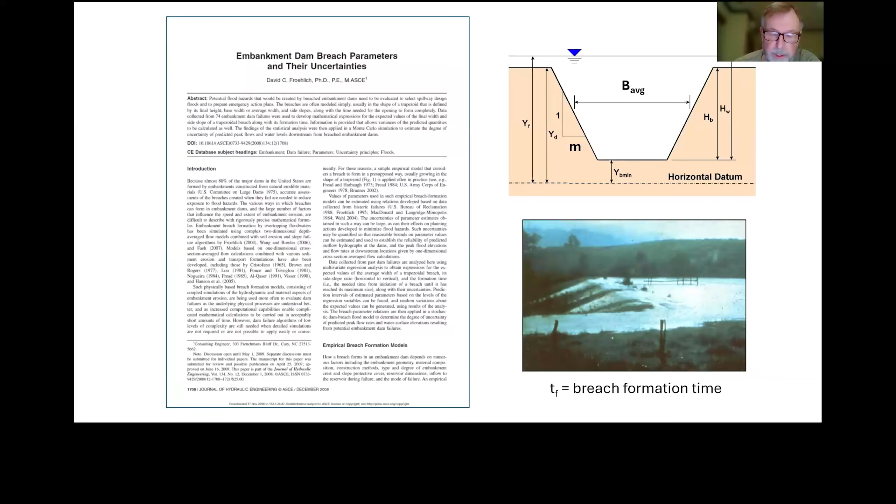But let me also mention that all of these predictions are based on collected data that I've assembled over the years. These are data that I find reliable. They're not just some numbers pulled out of the air or some newspaper article that says the breach width was about 100 meters. No, these are all data that I have documentation for, so I have confidence in them. Of course they're not perfect, but it's the best available.

So later on, after collecting more data, and realizing that Monte Carlo simulations involving, say, 10,000 realizations is a little challenging, there's a simpler way to take into account the variability of the outcome, and that's using a point estimation method.

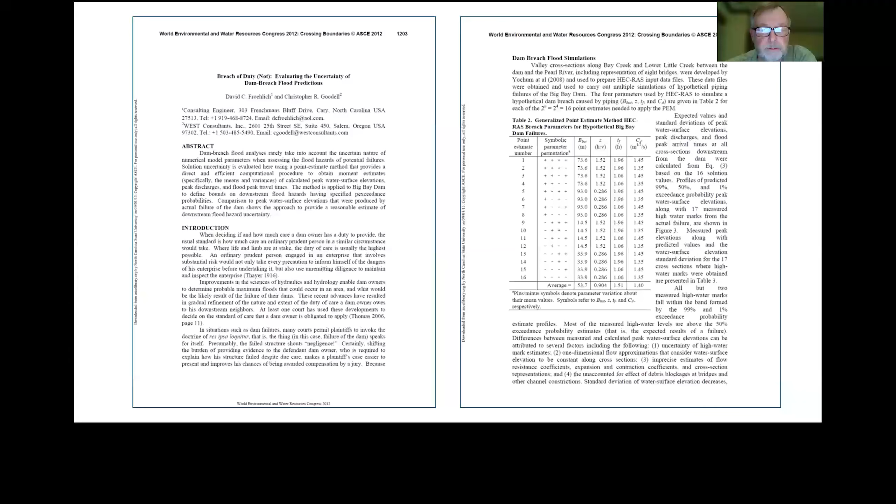That's covered in a conference paper presented at one of the ASCE Water Resources conferences. In this paper, which Chris Goodell helped out with by running a bunch of HEC-RAS models, we looked at 4 parameters: the 3 breach parameters—width, side slope, and formation time—as well as the discharge coefficient of the weir, or the breach. This requires 16 runs; you just make some permutations, and you can do that in a few hours.

Anyway, have a look at that paper if you like. Over the years, continuing to collect data as they come about, I updated the nonlinear regression models for these 3 breach parameters and presented that in a paper in River Flow, in 2016.

Along the way, a missing piece of information that went into the predictions was the width of the embankment. Suppose you have two embankment dams, and the crest width of one is 4 meters and another is 8 meters, with everything else the same. One would expect the breach parameters would be different.

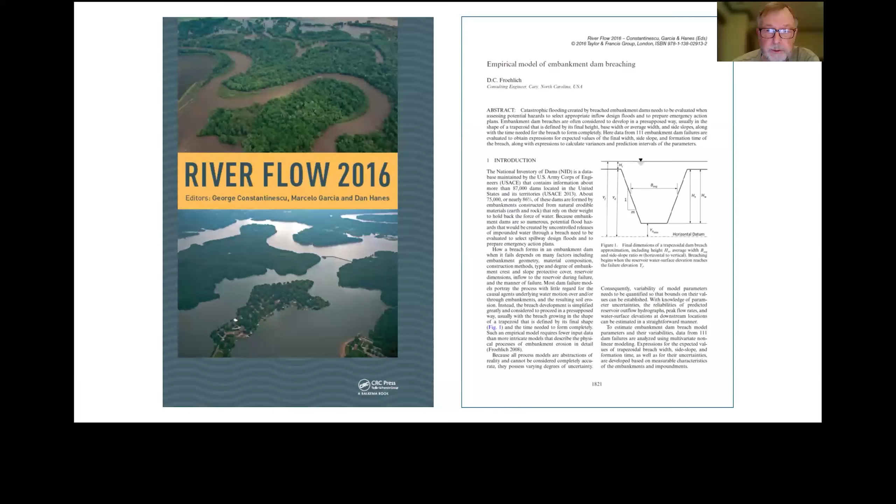With enough data, I was able to determine through these nonlinear models what the effect of this embankment width would be. So in this paper, I present two sets of equations, one that includes the embankment width, and another that doesn't. The simpler equations are not quite as accurate, but they're simpler, and the uncertainties are also calculated in this paper. So have a look at that.

As data become available, I continue to look at things from time to time, and recently I've been looking at the use of neural networks to make predictions of the trapezoidal breach model parameters. This is a paper that will be presented at the 2024 Riverflow conference in Liverpool. It hasn't been published yet, and I have a journal article on the way.

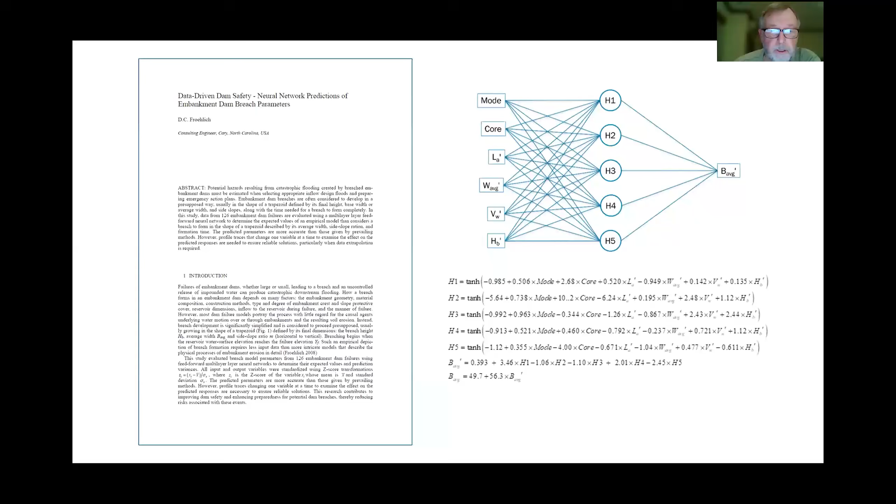The neural networks provide better predictions than the nonlinear models, but one needs to be very careful about applying neural networks, because with nonlinear regression models you can easily see how the parameters are extrapolated beyond the limits of the data used to develop the formulas. But with neural networks it's not so. You could easily be extrapolating beyond the limits of the data used to develop the neural networks and end up predicting nonsense. So one needs to be very careful and run profile traces, but potentially you could have much more accurate results.

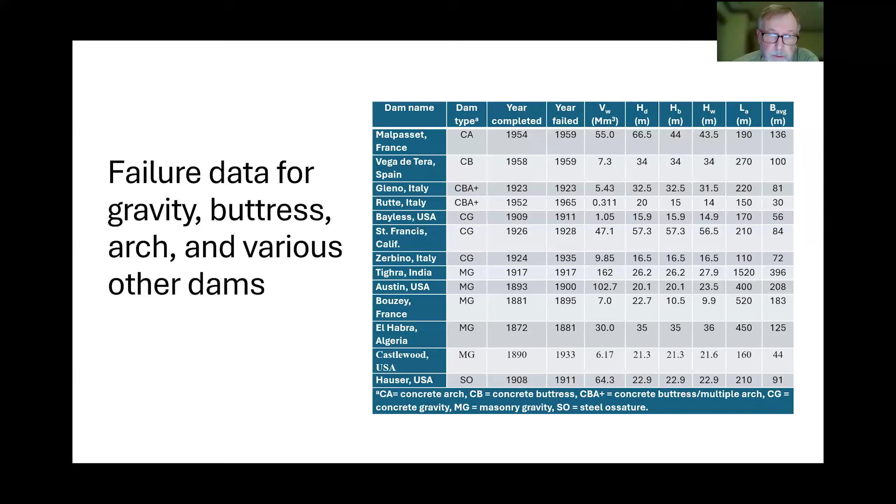We've only been talking about embankment dams made of earth and rock fill, but there are other dams made of concrete and masonry, and I've collected data for those as well, though there isn't much available. What little sense I could make of it is shown here - a little formula for the average breach width of concrete dams. There's a whole variety of failure modes: a massive concrete structure formed with blocks or different sections could fail by sliding or overtopping. If it's a relatively thin arch dam, it could actually explode and fail almost instantly, such as the well-known Malpasset failure. But that's all I know about that.

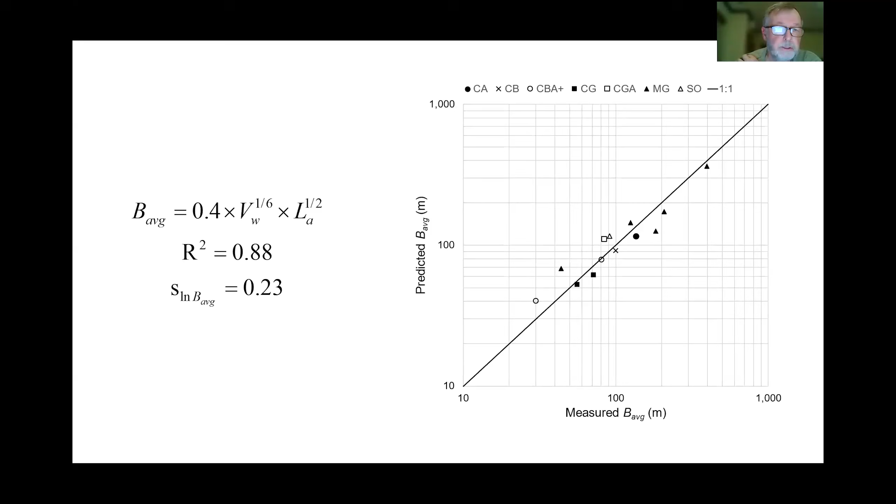Finally, I want to say these are all empirical models we've been talking about for trapezoidal breach formation, but you could also carry out a more causal analysis using a numerical model.

In 2002, going back a ways, there were tests carried out in Norway where they actually built embankments on a rock ledge between two reservoirs, almost prototype in size - 40 meters wide and about 6 meters high. A test was carried out in 2002. A whole group of people went out there with the intent to make predictions in advance of an experiment of overtopping one of the embankments. My predictions were made using my depth-averaged flow model.

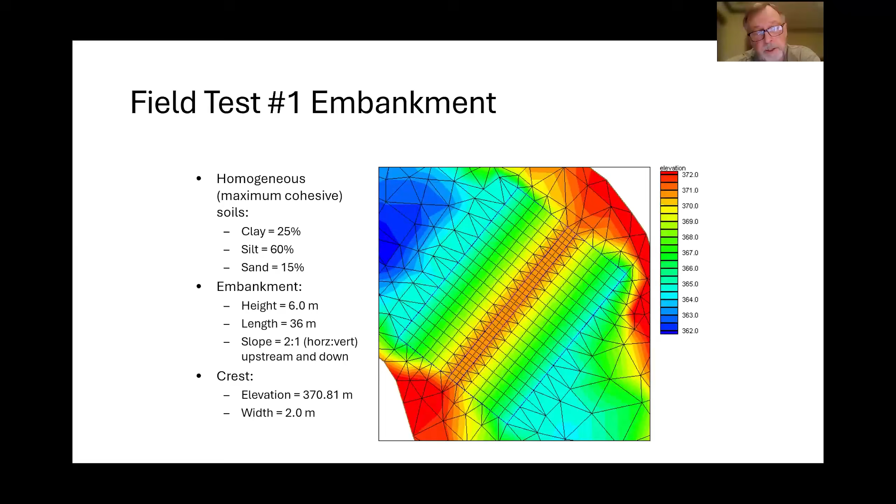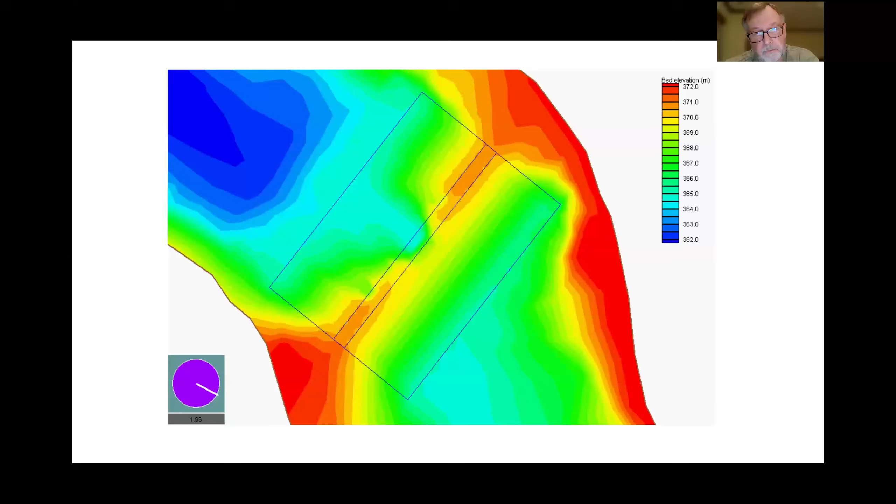There's the result of my simulation. You can see the embankment eroding away over time. We'll just let it go for a few seconds. That's enough - you get the idea.

That worked out pretty well. There's a plot of cross sections along the center line of the embankment as a function of time. It took about 2 hours for this embankment to fail, and basically my predictions are pretty good. They're not perfect, but they're relatively close, so the model worked pretty well.

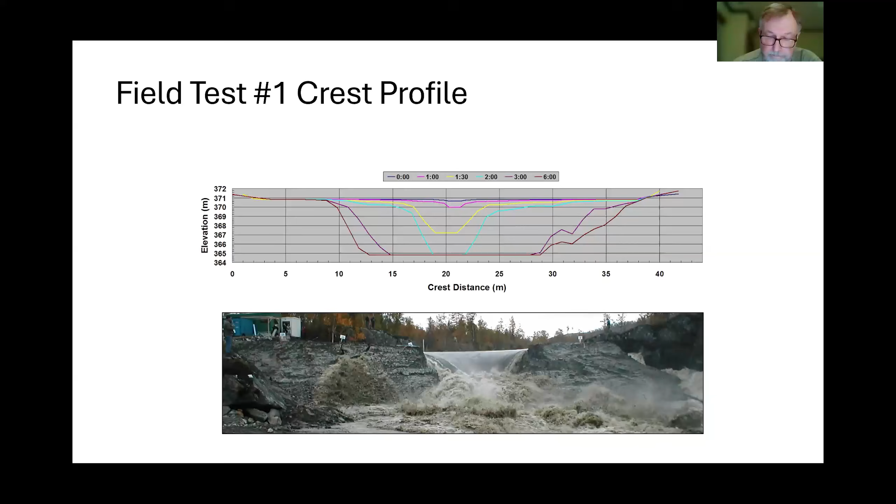And so that's the end of my contributions up to today.

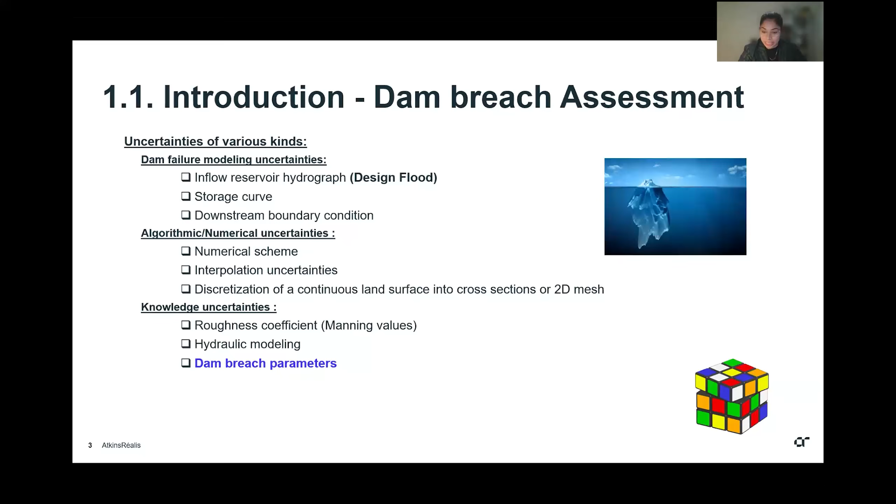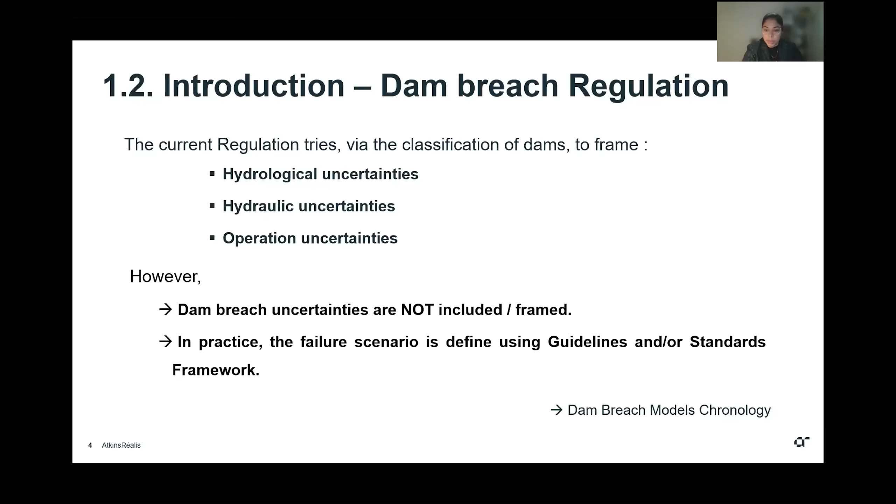Regarding the dam breach regulation currently available, it is interesting to highlight that the current regulation tries to frame, through the dam classification, hydrological uncertainties, hydraulic and operational uncertainties. Through the classification, you have your scenario of design, also your investigation visit defined. But however, they don't yet include the dam breach uncertainties related to the dam breach parameters, which in practice are defined using guidelines or frameworks. Overall, it's not a lack of intention, knowing that the dam breach scenario defines the floodplain downstream the dam, but it can be understood through the dam breach models chronology that I will present after.

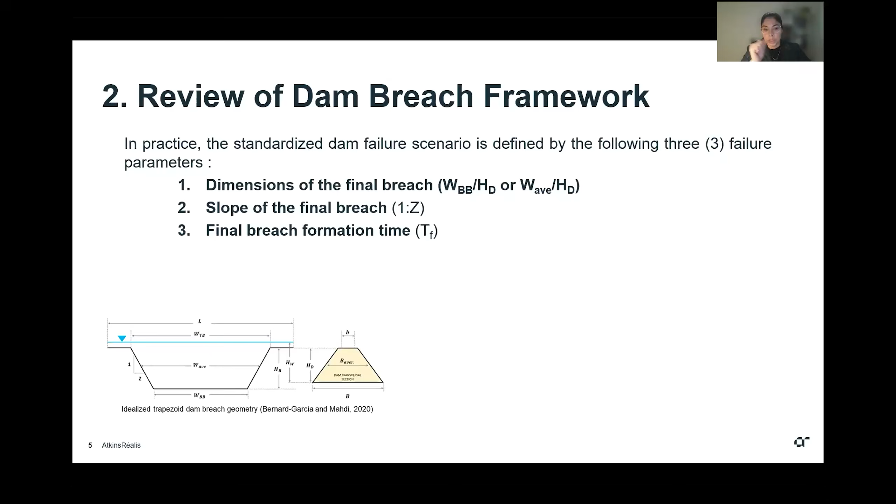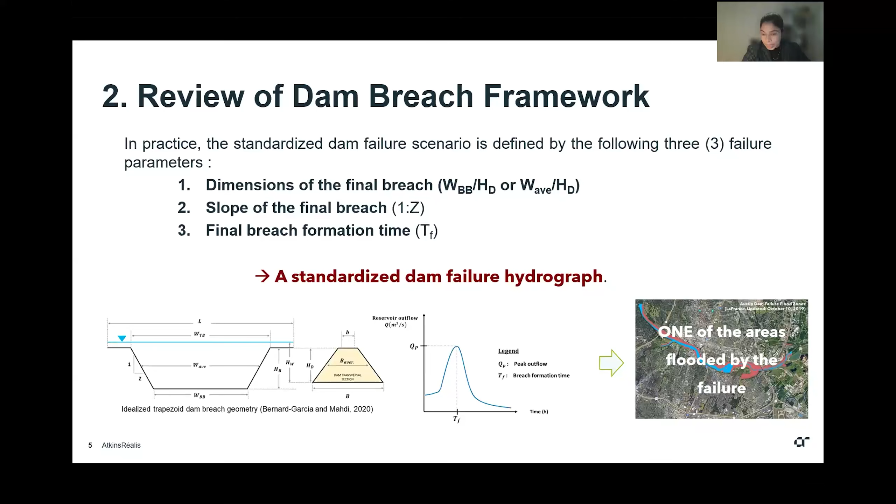So overall, a brief review of the dam breach framework. Overall, the standardized dam breach scenario is defined using 3 failure parameters that overall represent the dam breach shape, so trapezoidal, rectangular, through the dimension of the final breach and the slope of the final breach, also with the dam breach formation time. These allow engineers in practice to compute a standardized dam breach hydrograph, which is routed downstream the dam to obtain the floodplain map. So here's a brief review of the worldwide international framework.

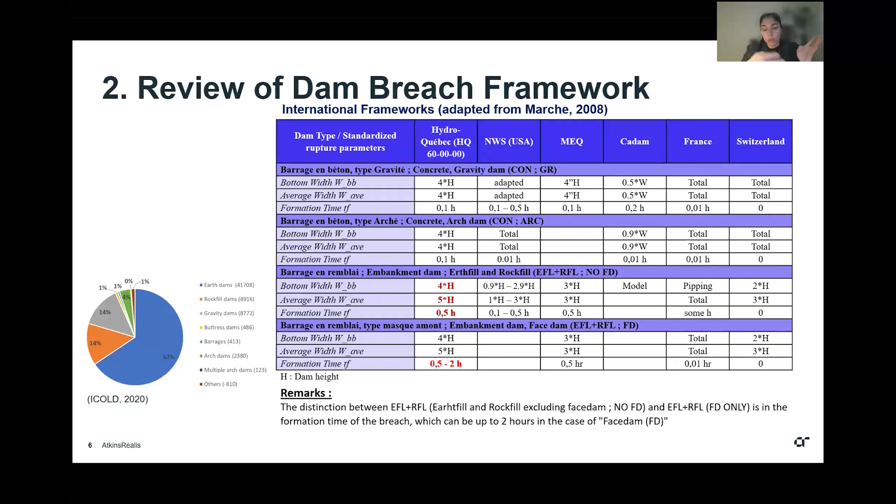So through Quebec and different other countries, it is presented in this table. All are the same, providing the 3 different failure parameters, which are defined depending on the dam type, so concrete dam or embankment dam, knowing that the failure process is different depending on the dam type. For a concrete dam, it's more instantaneous, so it's more easy to capture the uncertainties related to the failure, versus an embankment dam, which is a progressive failure with a lot of limits of knowledge, but where the uncertainties are higher.

So the problematic is that the specifications provided in most current standards refer to historical dam failures, but the real problem is that the accuracy of the specification is directly related to the number of historical dam failures available.

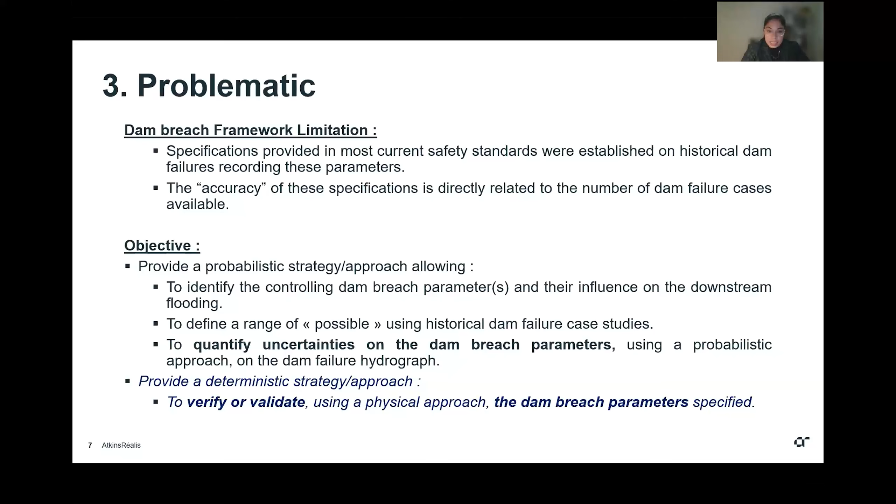In that perspective, this is why I choose here to present a probabilistic strategy approach, standardized, that helps to identify the controlling dam breach parameters in a dam breach study, define a range of possible dam breach parameters based on historical dam failure case studies, but moreover, that allows us to quantify uncertainties on the dam breach parameters on the dam failure hydrograph. And in a future perspective, if possible, to verify or validate these specifications using deterministic dam breach parameters.

After that, regarding the limits of knowledge, this is why a group from various countries went to Norway and developed the IMPACT project, which David just spoke about a few seconds ago, and which led to, I think, like 6 or 7 deterministic models and various papers regarding the deterministic model. This is why in the literature we see a lot of deterministic models appear through those years, but also, regarding this limit of knowledge, why we see parametric models, so simplified modelizations of the evolutive failure of an embankment dam, appear.

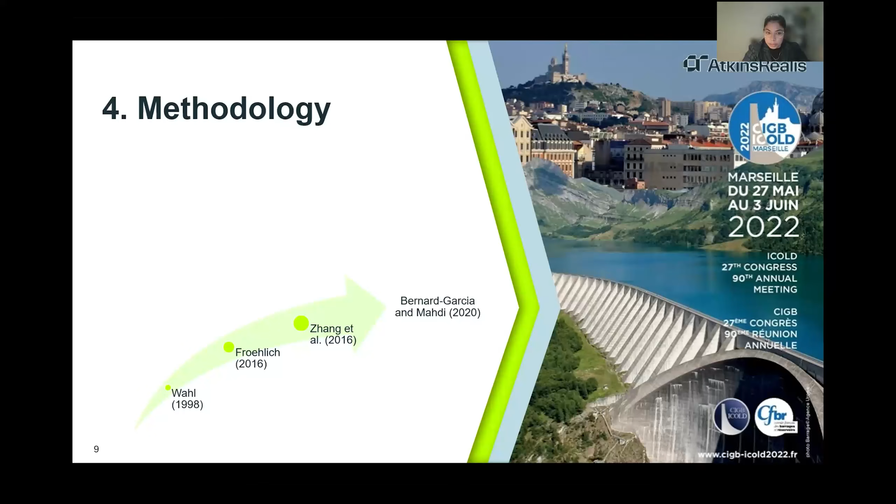So this is where all my research starts. What was the dam failure case study data available? This is where I ended up after doing a lot of research. It's very exhaustive and tremendous work, but I did it.

So in 2020, I published my database regarding 3,861 worldwide historical dam failures of all types, so natural, tailing, man-made, various dam failure types. This is where I started realizing that there's a lot of data there, and we need to set some standards into the registration of those dam failures.

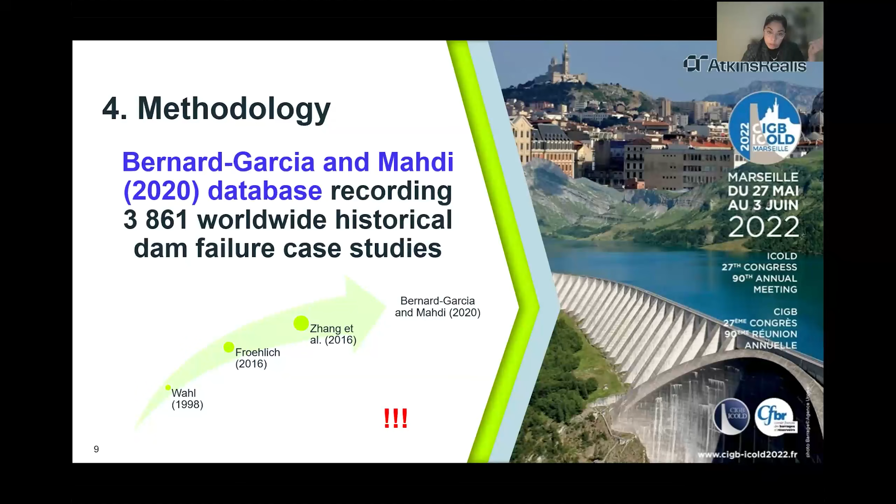So overall, the standardized probabilistic approach refers to historical dam failures. The probabilistic model used doesn't really matter, it's more about the strategy. Overall, it's based on historical dam failures that we use to fit a distribution.

So a probabilistic fit to generate a random dam failure scenario, that we run into a deterministic dam failure model, so parametric, to produce the failure hydrograph. We run these random scenarios for 1 million iterations, and for various Monte Carlo runs.

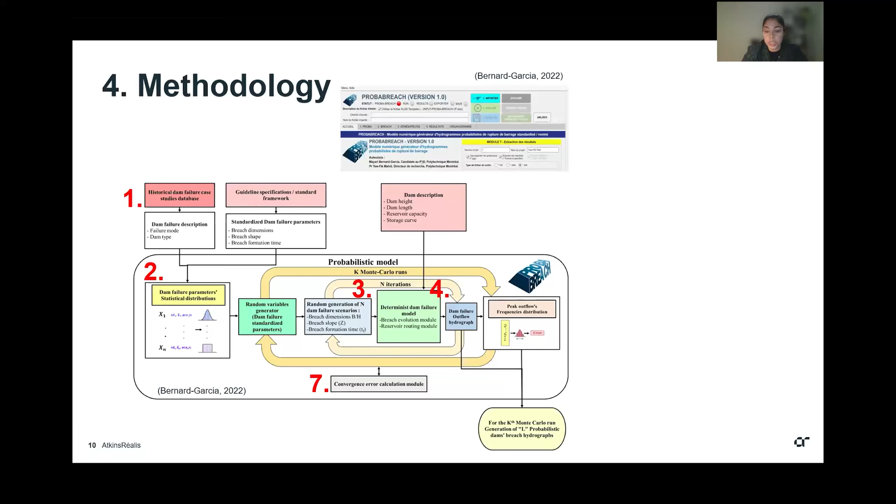So, for example, 1 million iterations and 10 Monte Carlo runs. Using the latest run, we are able to finally, based on the peak outflow, obtain these probabilistic dam breach hydrographs. So overall there's PROBABREACH, which I developed in my PhD, but there's also McBreach, which can be coupled with HEC-RAS.

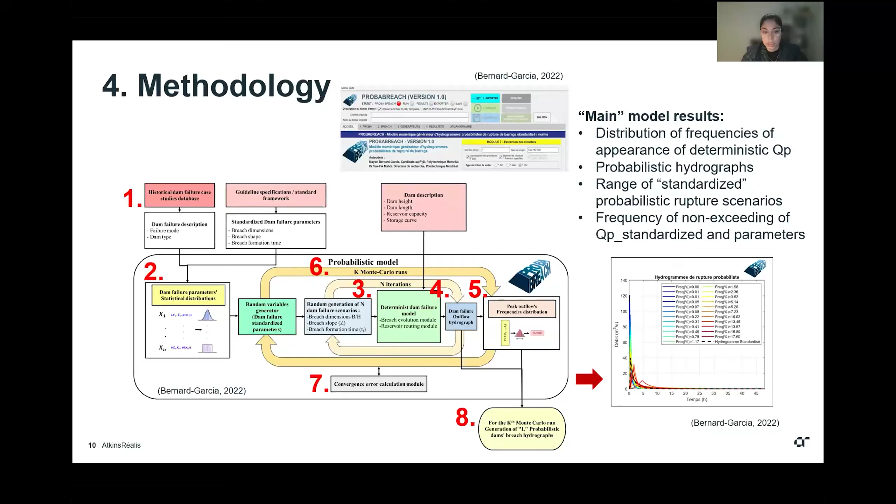Most of engineering practice knows HEC-RAS. So here are a few results for the run, results provided with PROBABREACH, so here, some probabilistic hydrographs.

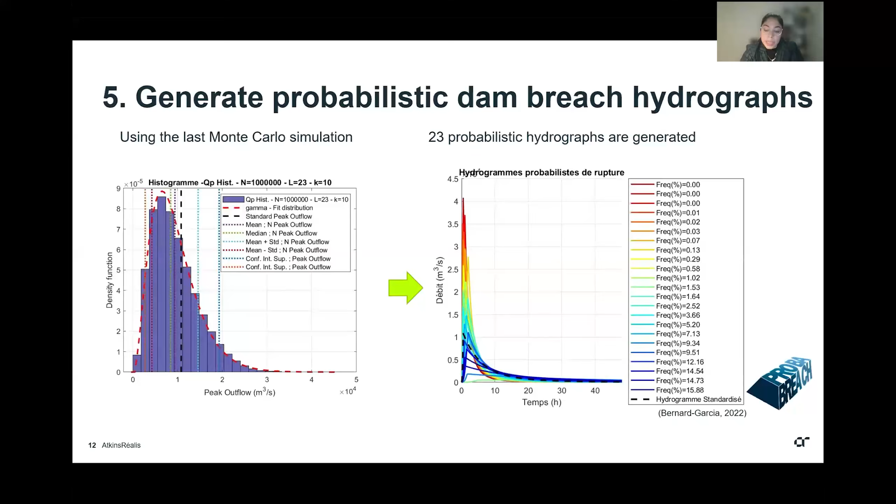The main discussion remains for me, but for all I guess, what is the influence of dam breach parameters? So maybe sometimes we don't need to set a fit distribution or generate various scenarios for some dam breach parameters. But also, what is the fit distribution that we will consider in those types of studies?

We'll, in the literature, again here we are not, we haven't decided let's say, but also the number of Monte Carlo runs to consider, and the number of simulations in it, which type of deterministic model that we want to consider.

All of that will need to be studied over the years, but also thinking in a way that in that standardized approach, knowing that it takes a lot of time in running, so for engineering practice, we need to keep thinking about it.

So overall, in conclusion, all this is to improve, of course, flood maps, and eventually be able to, whatever probabilistic models we will be using, regard the influence of dam breach parameters, to be able to provide probabilistic flood mapping, in order to maybe eventually collaborate with insurance companies and see how we can manage these emergency plans better.

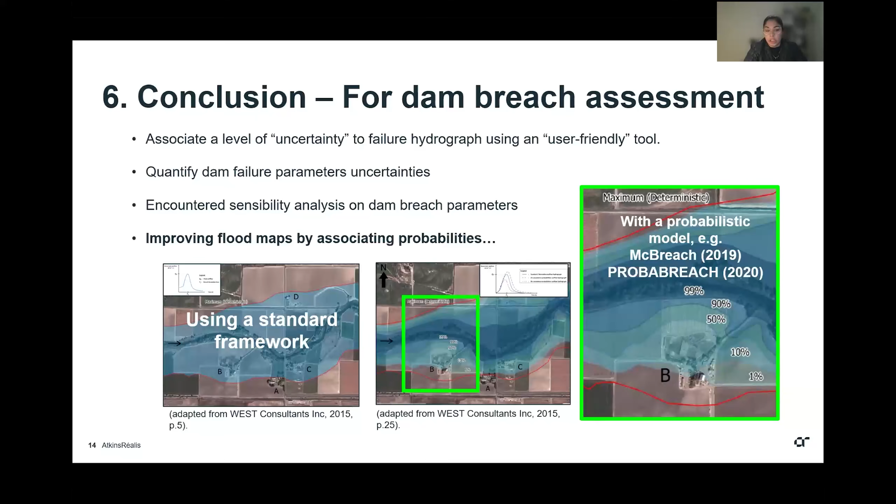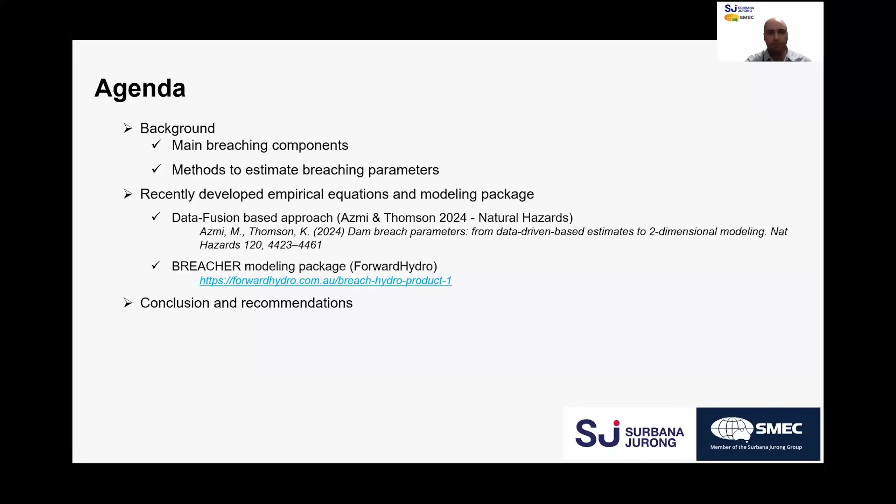Estimating dam breaching parameters is a challenging task, and the main reason is there is limited reliable recorded information and data sets. Even with cases where there is some information, we are not really sure it's fully reliable. People have gone and measured, we rely on them, but there are some levels of data set failures. There are also complex relationships between different items, from the geotechnical side of things to the hydraulic side of things.

That's why if you look into the literature, you see there is a very high level of uncertainty recorded, going from 0.5 to 1 order of magnitude. So when we have this level of uncertainty and prepare something to send to a public service, there are times the public service is not 100% sure about what we are sending them. They are looking for more information or more level of certainty.

If you look into the literature and cluster all the models that have been used, we can put them into 4 main categories: physical laboratories, computational fluid dynamics or CFDs, machine learning, and empirical equations. If we give some scores based on complexity, accuracy, user-friendliness, and cost, we see that for physical laboratory you get more accuracy, but you need to deal with a high level of complexity, or pay money, and have people build things and deal with all of that.

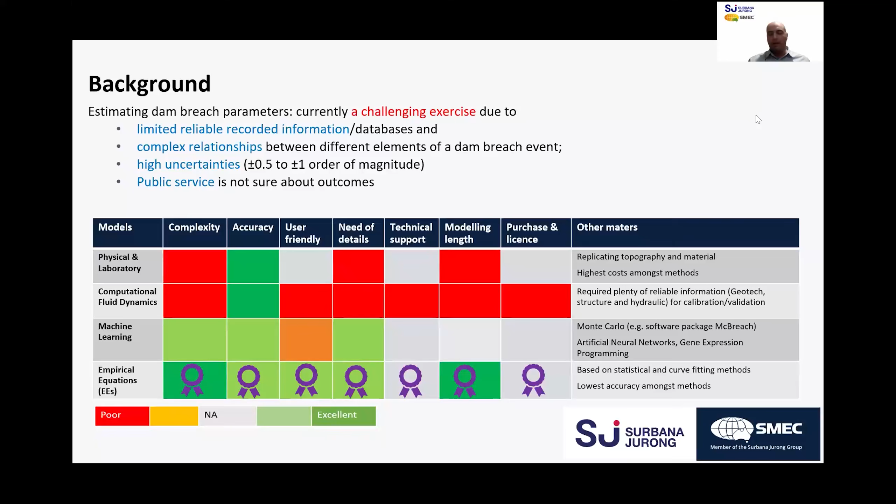I'm not going through all of these details, it's already mentioned. So there are 3 main breaching parameters: failure time, final breach width, and the most important one for flood assessment, breach peak outflow.

The main challenges and shortcomings for empirical equations are limited data, as mentioned, and most of the required data is for small dams, usually with a height less than 15 meters. You need a good understanding of the failure mode you're choosing and why it happens. You need to understand dam types, what type of dam you're working with, and it's very important to know the geotechnical characteristics and understand what erodibility means. You need to talk with geotechnical people, know if any additional safety component has been added, and understand that all of this can add uncertainty. It's not just clicking and using the equation; you need to understand and bring that information together.

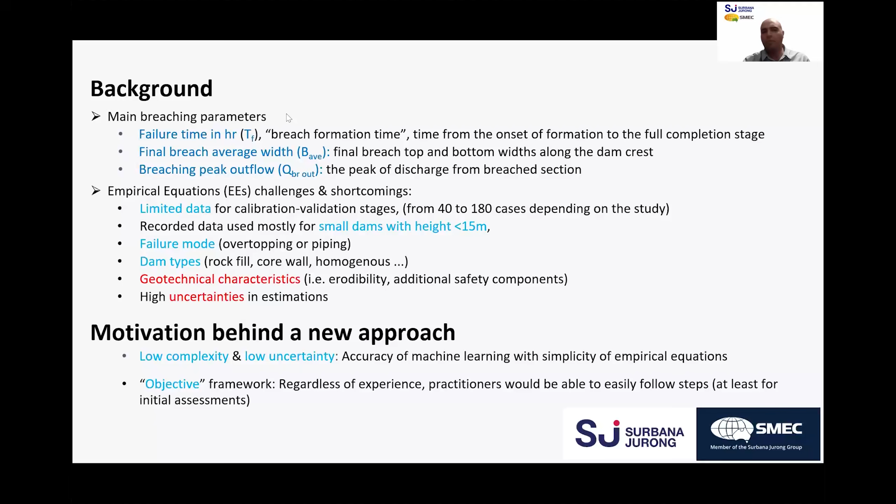So our motivation behind that method was low complexity, low uncertainty, bringing the accuracy of machine learning with the simplicity of empirical equations, moving from a subjective approach to an objective approach. Regardless of experience, you should be able to easily follow the steps for this initial assessment.

Why a data fusion approach? If you are dealing with a phenomenon that is complex or multi-aspect, using just one single element or method is not sufficient, and sometimes it's not correct. If you go have a chat with your GP and they decide everything based on that conversation alone, in many cases that is not enough. You need to go and do blood testing and other things, bring it all together, and reach the level of decision needed.

Similarly, this is the same case for dam breach and consequence assessment. It's a complex exercise. You need to have all the information. You need to bring people from multidisciplinary teams and add all of that information together to reach the level of confidence required.

So the steps for the data fusion approach: we gathered the information, using recorded information from literature reviews that have already been published and properly cited. We fill the gaps. Initial assessment involves filtering out those cases of observed data that we weren't really sure we could use, because they are not really reliable enough.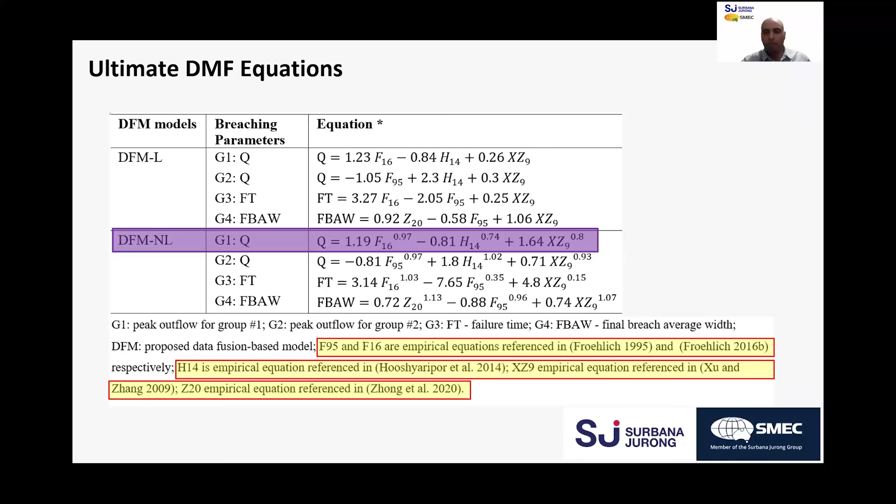When we use the cross-validation techniques, for each iteration of training and test we were able to calculate those 5 performance criteria that I mentioned. So for 100K iterations, we'll have 100K values, which let us present the distribution of the values in the form of a histogram. When I say distribution, I don't mean probabilistic distribution, just the box plot or histograms.

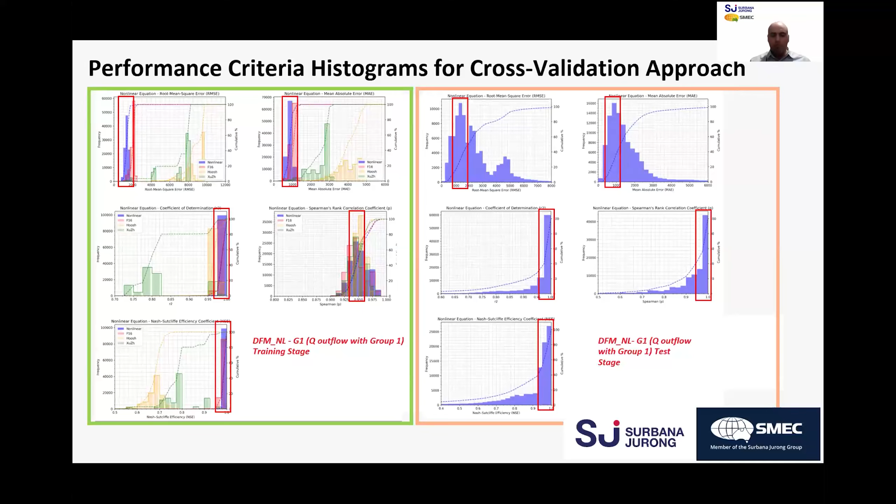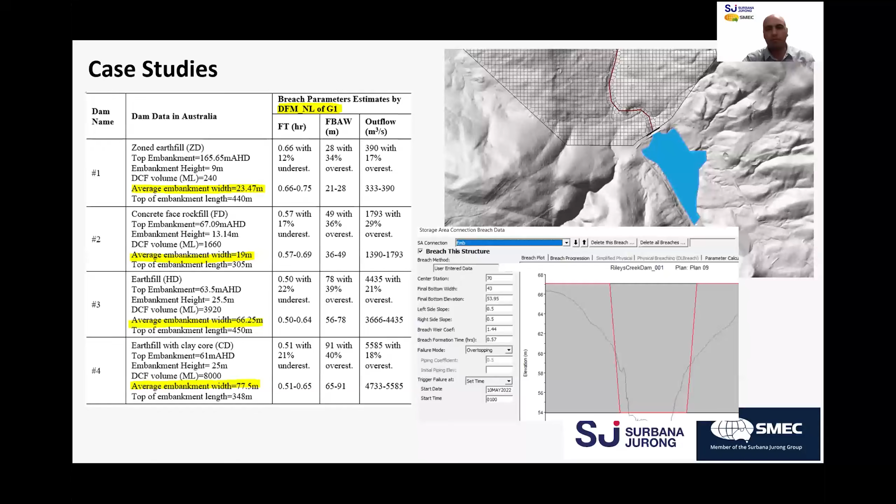Next slide. So there are 4 examples where we applied those step-by-step methods, using HEC-RAS 2D modeling to see if it's valid, and whether we're reaching that level of confidence. We can go through these practices more in the June webinar.

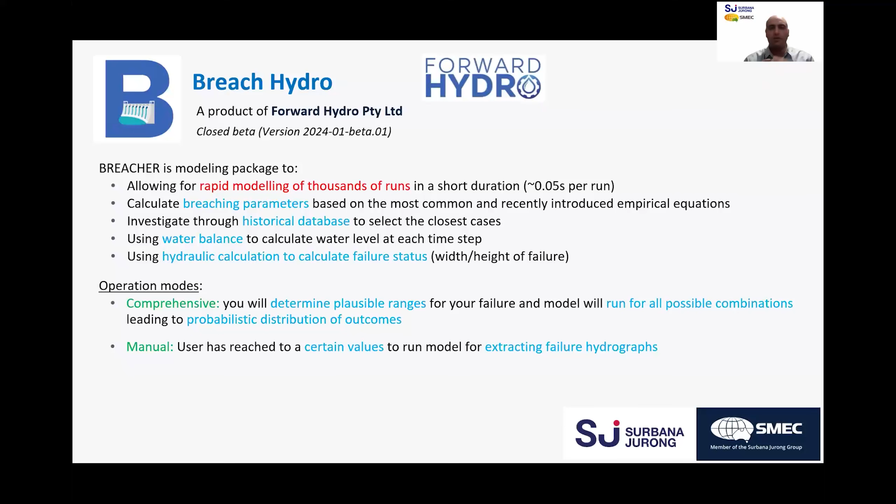I'd really like to go through Breacher. Breacher was developed by Forward Hydro as a rapid modeling tool running thousands of simulations to calculate breaching parameters based on the most common, recently introduced empirical equations. It investigates the historical database to select the closest cases, uses water balance to calculate each time step, and uses hydraulic calculation to determine the failure. It has two modes, comprehensive and manual, so you can do sensitivity analysis, or when you have a certain level of certainty, you can extract the failure hydrograph directly.

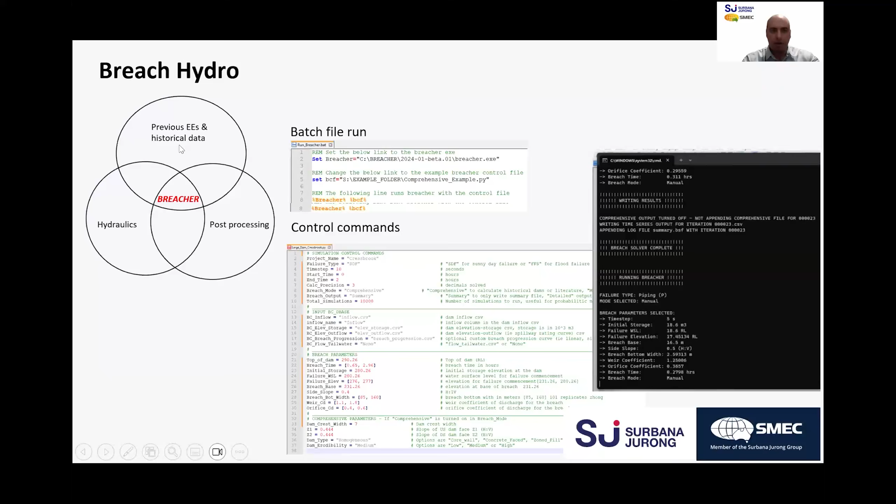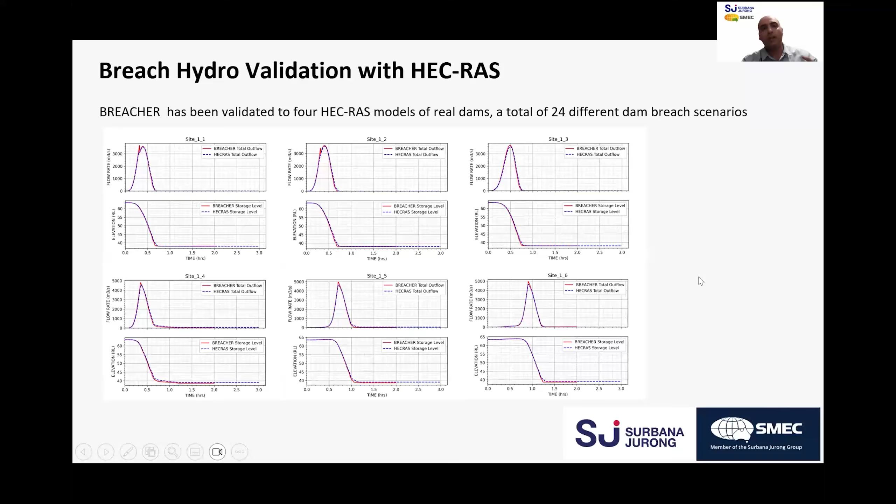If you're a HEC-RAS person, the structure of running it is very similar. You run it by putting your commands in a text file and run the batch file. It has 3 main steps: the previous empirical equation, historical data, calculation of hydraulics, and post-processing. It's already been validated against HEC-RAS for 24 different dam breach scenarios, so it's fully reliable and shows great performance.

One of the fantastic features of Breach Hydro is the Breacher post-processing. It gives you the ability, when running comprehensive mode, to see plots of the exceedance, cloud plots, and errors, all of which give you more information to support your decision-making.

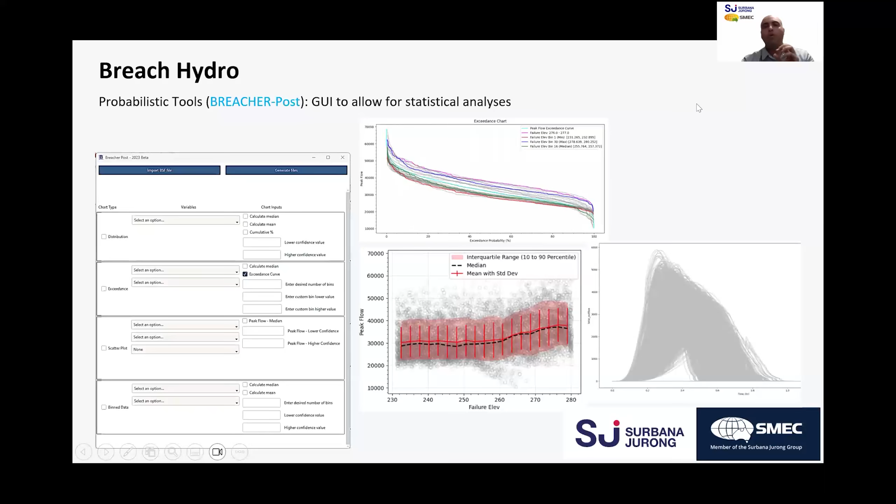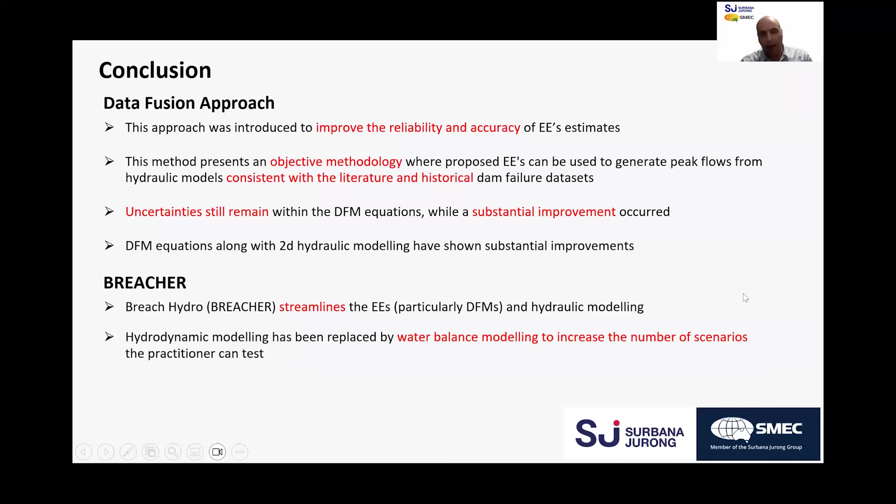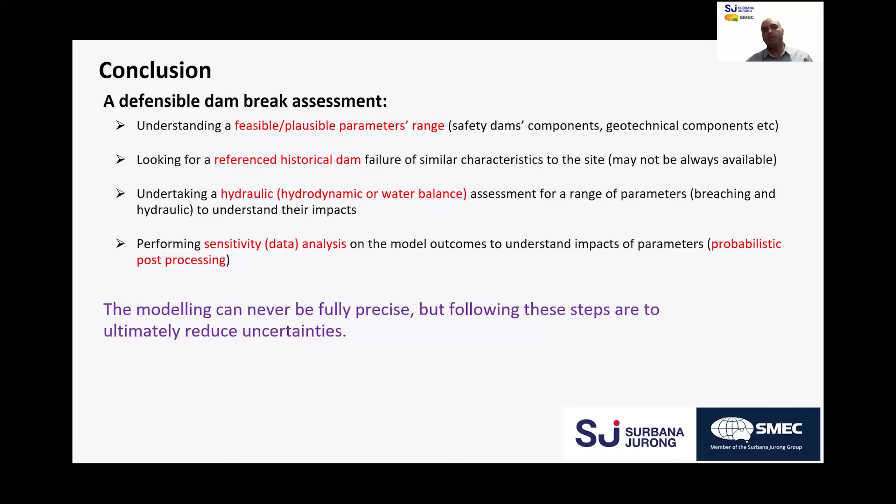So in conclusion, as I said, let me go to the next one. You need to ensure you have good, enough information. You need to have enough knowledge. You need to know what kind of uncertainty you have for that specific case, and then choose the best tools available and run it. Models can never be fully precise, but following the steps we mentioned in our paper, along with these tools, we should be able to reduce the uncertainty as much as possible.

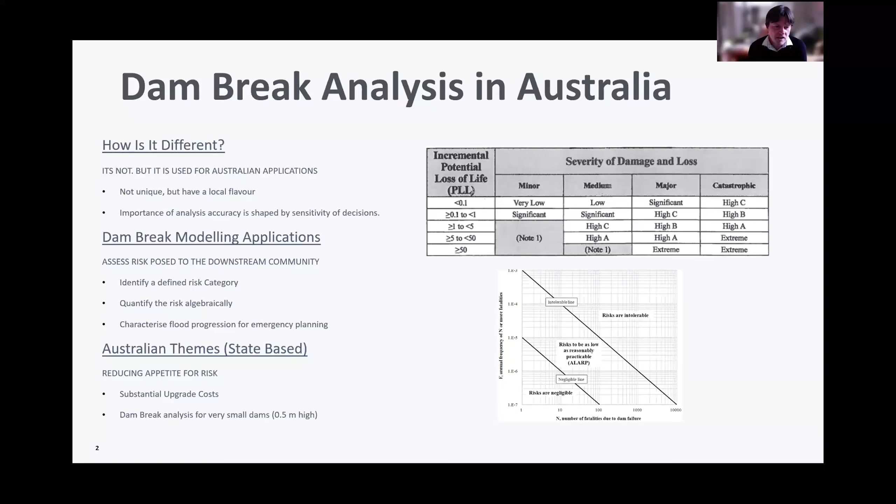So what does this mean in practice for the dam break parameters? One way of looking at it is to say dam break parameters matter. There's a fair bit of variability in those parameters - the times and widths can vary by factors of double or triple, and the outflows can vary by orders of magnitude. So we want to try and get those estimates as accurate as we can, so we can make appropriate decisions on investments.

But then again, maybe they don't matter that much, depending upon the application. So what's the sensitivity of the parameters? The inputs can vary substantially, but investment decisions aren't made based upon the input parameters - they're made based upon the outcomes from our analysis. So what we really need to do is understand the importance of those parameters relative to our overall outcomes.

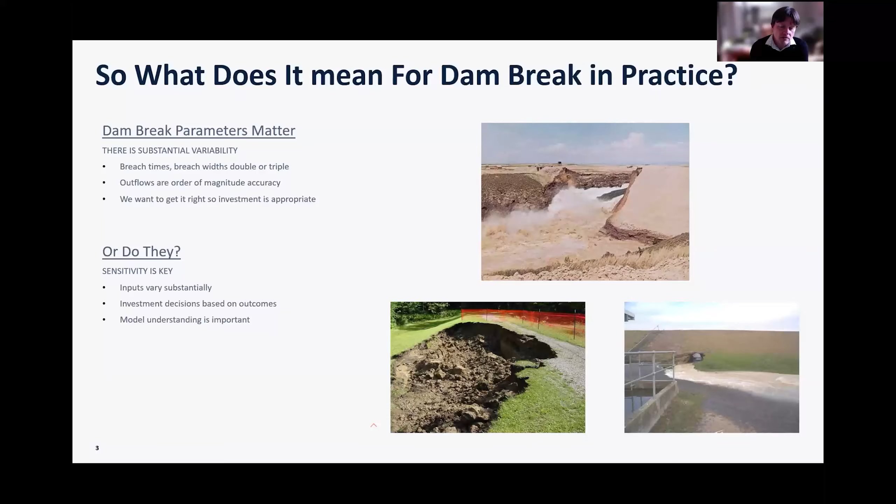So we can see here, if we're doing a sensitivity analysis, that there's a progression. The aim of the analysis is not actually to assess what the dam break parameters are - that's a step on the journey. Our aim is to accurately, or as well as we can, assess what the risk is so that we can make appropriate decisions in relation to our dam assets.

So we may have dam break parameters which can in turn be used to produce a dam break hydrograph, and it's most obvious where we've got the impact of the dam break parameters on the dam break hydrograph. That in turn is put into a hydraulic model, which produces a flood inundation map, and we use that as a basis for assessing the consequences of the breach in terms of dollars and life safety. That is then used to assess where we sit in terms of the consequence component of our risk. So what we really want to understand is how the dam break parameters affect our risk category, or at least the consequence component of that.

Understanding the variability of those parameters in context is important, because we may find that, as we go down that list, there might be something else having an equally great impact upon our outcomes - and I'm looking at you, life safety. There are some pretty substantial leaps of faith we make when we assess a number of aspects of life safety. So the dam break parameters may not even be the most critical component in producing our outcomes, and we want to try and understand that.

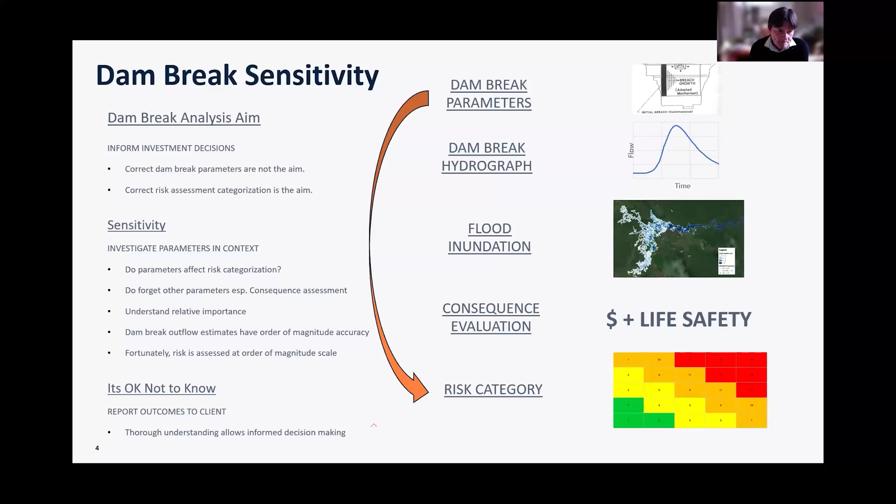We do have to provide a recommendation to a client, but they will often appreciate us telling them, look, here's what we're going to provide as our best estimate, but it can vary, and it allows them to make an informed decision. So, moving to the next slide - I've got a graph here from an example where we found that the outcomes weren't particularly sensitive to the modelled input parameters. It's a particular case, an interesting one, where we had a dam built in the 20s, it failed, and then it was rebuilt, and we had a data point from that failure where there was a flood mark from the failure at the key township downstream by about 4 kilometres.

So the dam height at 27 metres, volume 3,500 megalitres. It was a concrete face rockfill, so the breach time is likely to be quite rapid, and we varied the model width. The difference in elevations, which we've got shown on the graph there, was about 3 metres close to the dam. But by the time we got down to the point where we had the majority of our consequences, about 4 kilometres downstream, it had settled down to about 0.4 metre differential.

The max, probably the best accuracy we could hope for in relation to the estimate from our actual data point would have been plus or minus half a metre. So the difference in those parameters didn't end up having an impact upon our overall outcomes, which is a very comforting position to be in when we're reporting back to the client.

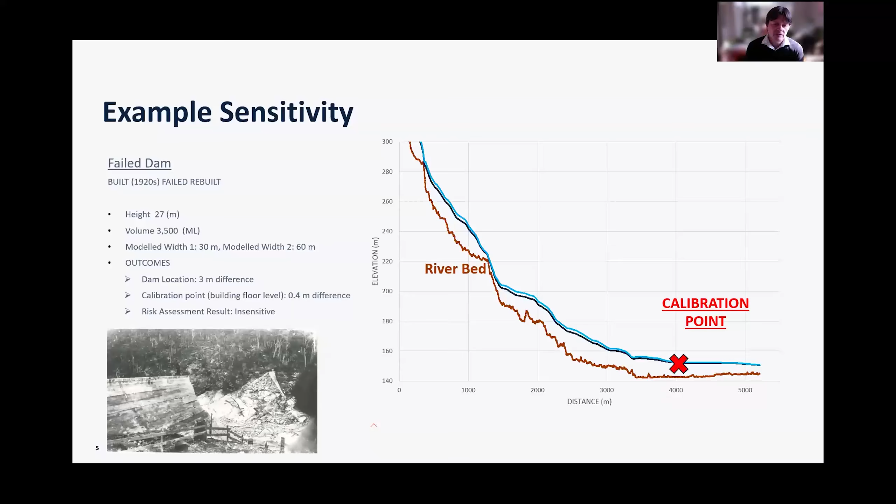An alternative may be a case where that doesn't occur, and we find that the outcomes are sensitive. So let's say the breach location might have been a bit further upstream. In that case, we may recommend to the client that they focus a little bit more on trying to get a better representation of what that breach width might have been.

So the key message is that breach flow is a highly uncertain procedure, but we inoculate ourselves against that as much as we can by doing a sensitivity analysis, so that we can understand exactly how those parameters affect our outputs, and then we want to make sure that we communicate that as clearly as we can to the client so that we can allow them to make an informed decision when it comes to their investments.